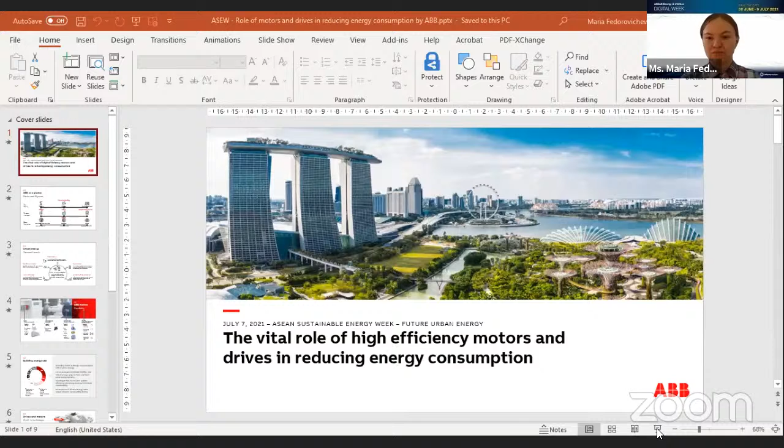Thank you, Peter, for introducing me. I'm extremely glad to be here and present to you solutions by ABB for improved energy efficiency. I will start sharing my screen shortly, and let's begin. As Peter said, I represent ABB Motion, which means I will be talking about motors that provide motion and the drives controlling motors, as well as about services for improved energy efficiency and reduced energy consumption.

First of all, I would like to introduce ABB to those of you who are not familiar with our company. ABB is a global industry player, a technology leader, and we manufacture and offer products, systems, and services for different kinds of industries, for buildings, and for transportation and infrastructure. ABB is a global player, and we operate in over 100 countries globally. We have over 100,000 employees, and we are present in Asia, Middle East, and Africa.

Our revenue last year was about 28 billion USD, which gives some understanding about the company scale.

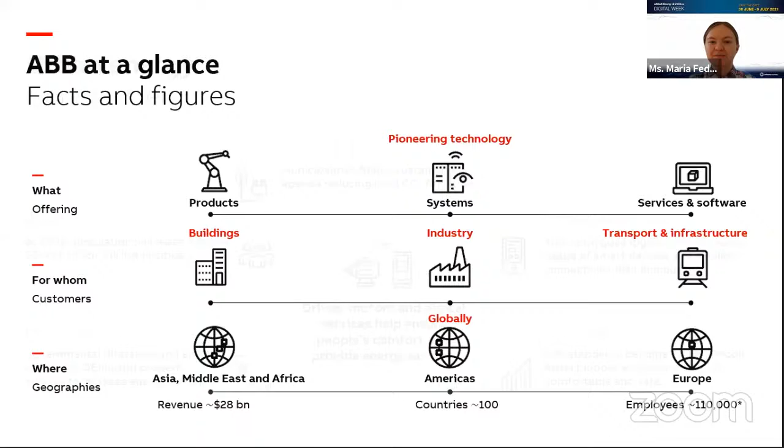Let's move to the essence. I would like to talk a bit about general trends present in urban energy. One of the biggest trends is energy efficiency. There are many different governmental directives and initiatives on improved energy efficiency, and those regulations force OEMs as well as property owners to improve the efficiency of their products and of the facilities they own, and of course buildings are no exception.

At the same time, another very noticeable trend is population increase. By 2030 population will reach 8 billion people, and 60% of the population lives in cities, which is a reason to think more about the sustainable urban environment.

Sustainability is another very big trend. It embraces energy efficiency, but besides energy efficiency there are also other factors coming under sustainability, for example wise material usage. Different municipalities have their own agenda on sustainability and CO2 emission reduction.

Another very big trend is digitalization. The world truly goes digital, and the usage of smart devices and wireless connectivity increases substantially day by day, which means our solutions should support this trend and support digital capability. I see that younger generations also expect all solutions to have some sort of digital capability and follow the IoT agenda.

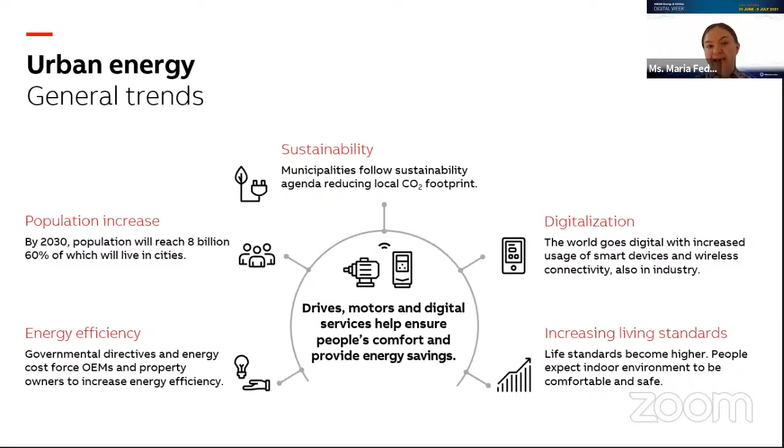One more trend which truly affects urban energy development is increasing living standards. Living standards become higher and higher because people expect the indoor environment to be more comfortable and much safer than it used to be years ago. I'd like to highlight that drives, motors, and digital services by ABB truly help ensure people's comfort and provide substantial energy savings. We will talk a bit later about this in the presentation.

First, I would like to introduce the portfolio of ABB Motion we will be talking about, and discuss how it helps improve energy efficiency. We have drives in our portfolio ranging from kilowatts to megawatts, meaning we can cover a very wide range of applications. Talking about urban energy, it can be small HVAC applications inside buildings, and it can be huge cooling plants, for example. Within the drives offering, we also have digital services.

We also have mechanical power transmission and electrical motors in the ABB Motion portfolio, again covering a very wide power range, meaning a very wide range of applications. Together with digital services, we have IEC motors, NEMA motors, and large motors and generators in our offering.

What I'd like to highlight is that we have truly innovative motor technologies in our portfolio, for example synchronous reluctance motor technology. Probably the biggest benefit of this technology is that besides very high energy efficiency, it also offers a very high level of sustainability because it does not have any rare earth magnets in its design. This is something we always emphasize, so it's also a very sustainable product.

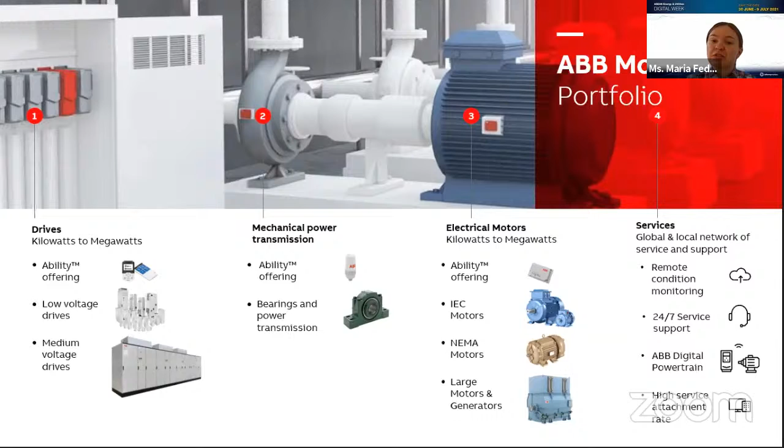Let's talk about urban energy a bit more. Talking about the urban environment, buildings are something to focus on. Building energy use: about 50% of energy used by an average building goes to HVAC—heating, ventilation, and air conditioning applications—as well as to water supply systems. It's wise investing in HVAC energy efficiency improvement, because with this we can substantially decrease building energy use, and also the energy use of the urban area.

So you truly see how important it is to invest in building energy efficiency. The International Energy Agency has reported that about 30% of energy used globally is actually used by buildings. This is the reason why we are so focused on building energy usage specifically.

At the same time, besides improving energy efficiency of buildings and HVAC systems in particular, it's also important to look closer at district energy in urban areas, because this can further improve energy efficiency and sustainability of urban areas.

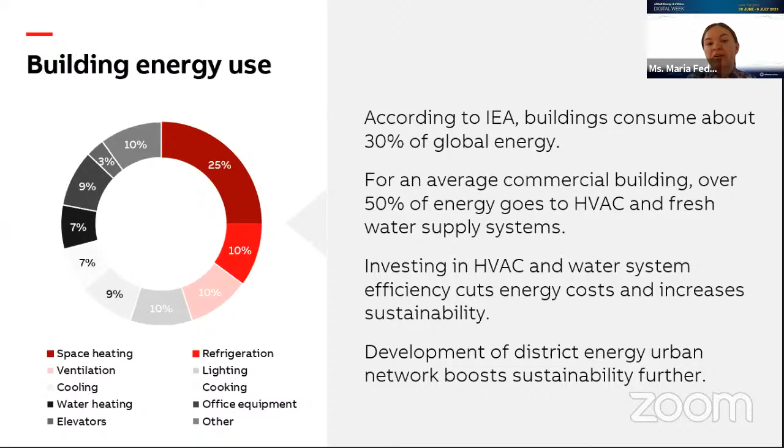Considering drives and motors' role in improving energy efficiency, motors run different kinds of HVAC applications - fans, pumps, compressors - and investing in motor technology can reach substantial energy savings. I already talked about synchronous reluctance motor technology in our portfolio, and this technology can offer up to 30% higher part load efficiency compared to traditional induction motors with the IE3 energy efficiency level.

I'd like to highlight that here we talk about part loads, and as you know, building HVAC systems usually do not operate at 100% load. So we often talk about part load operation.

But going further, motors are controlled by drives, and drives in turn can significantly cut energy usage in HVAC applications. On average, they can save 20 to 60% of energy used by fans, pumps, and compressors.

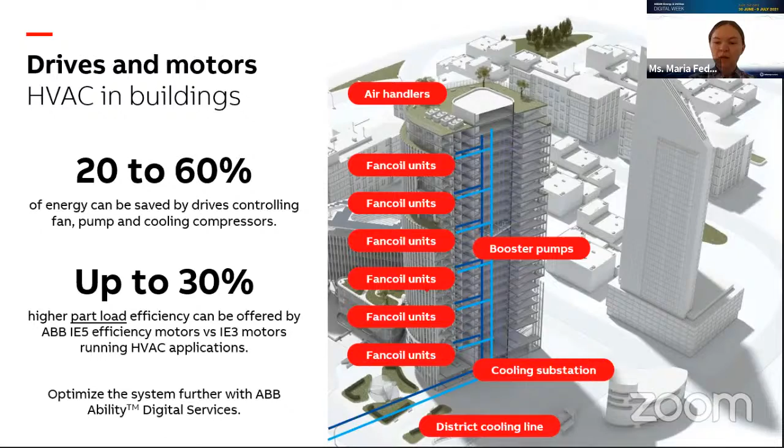One more thing I highlighted earlier is that district energy is something to focus on as well, because up to 50% reduced cooling energy consumption can be achieved with district cooling. So centralized cooling generation is much more efficient than cooling generation on site or individual cooling generation.

And then, of course, drives and motors play a substantial role in district cooling as well, because you always have a cooling plant generating cooling, and you always have compressors or chillers run by motors and then controlled by drives. So drives and motors are actually present in all HVAC and cooling applications in particular.

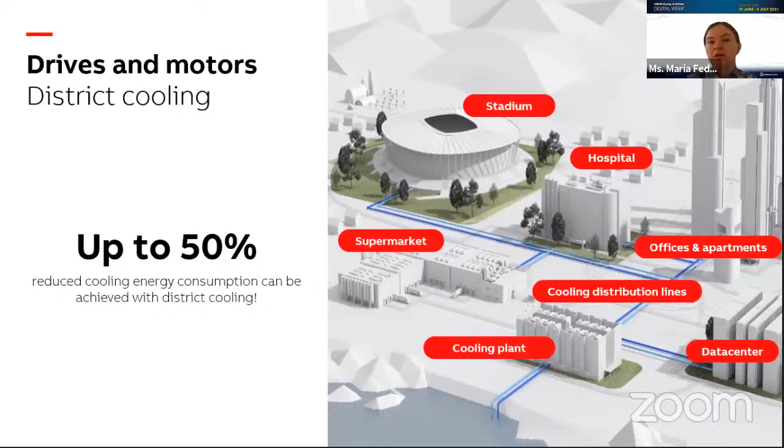And this is my main message for today: to look closer at what kind of drive technologies you use and what kind of motor technologies you use. Because using the most prominent motor and drive technologies, you can make the highest energy savings in your cooling applications.

But then services, digital services, is something not to forget about, because digital services truly improve the transparency of your HVAC processes and cooling generation in particular. With the ABB Ability digital services, you can monitor HVAC application performance and see what kind of inefficiencies you have, and of course take actions on eliminating those inefficiencies.

At the same time, talking about reliability, some of the buildings supplied with cooling are mission critical facilities, and of course we have to ensure the cooling process continuity. So digital services are able to significantly eliminate the downtime of your HVAC applications.

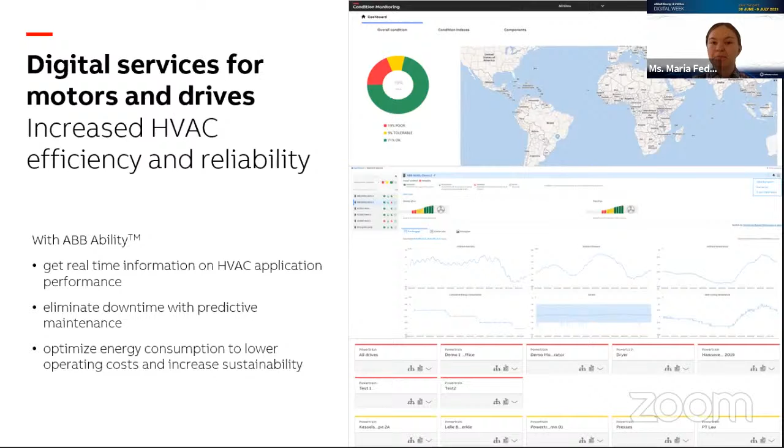And then, of course, seeing the inefficiency points, you can optimize the energy consumption and eliminate those points. This transparency gives a very good card to play, I would say, and this is why we keep increasing the number of digital services in our portfolio and the digitalization rate of the sustainable and energy efficient solutions by ABB. So it was a quick presentation from my side.

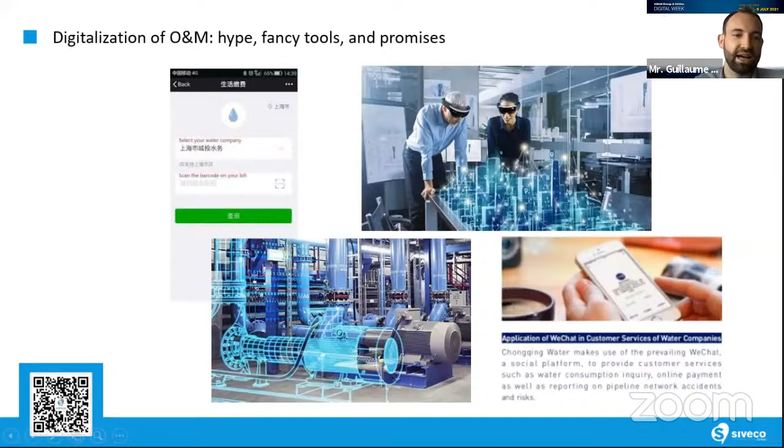So here is a topic: we've seen a lot of hype regarding the future of O&M, primarily driven by exciting developments in information technologies. We've seen many promises for operation and maintenance to work magically and be transformed through the power of big data. Sometimes we hear assumptions that predictive algorithms will replace technicians, and that all breakdowns will be avoided. In fact, this has been very much exaggerated and somewhat misunderstood. However, there is a real transition taking place, and I will share some practical insights on how we're seeing this fourth industrial revolution taking place, and what it means for the O&M worker of tomorrow.

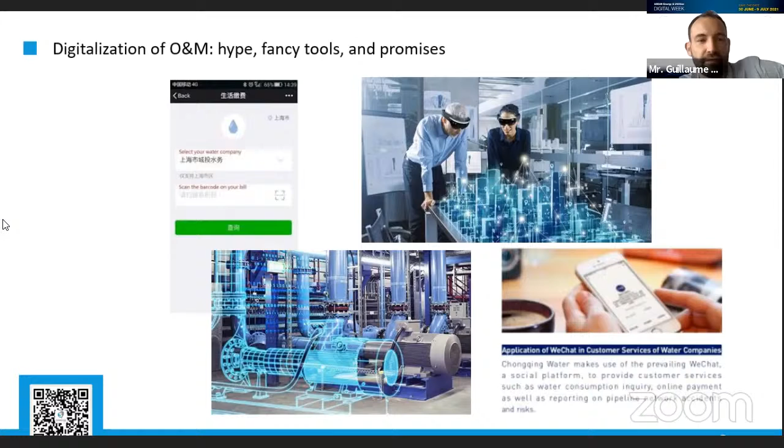So before jumping into the future, I'd like to go back four years in the past and share with you some very profound and interesting insight we got from a survey that we ran together with industry and academic partners. In this survey, we asked simple questions about operation and maintenance to managers with industrial and infrastructure backgrounds. The conclusion was that, far from being seen as purely a cost center, maintenance and operations were considered tightly related to risk management and compliance.

That's to say that most managers were considering the discipline in a highly strategic way. That was a big difference from the traditional narrative that puts cost reduction at the front. The reality is that practitioners believe cost efficiency derives from compliance and effective risk management, and that was a very important takeaway that we brought further in our thinking here.

When we look at some trends, we can see this survey was a good illustration, because there is increasing complexity and distribution of assets. We used to have centralized power generation; now it's more and more spread across various locations and technologies. It's growing in technical complexity and connectedness, and on the other side, ownership, operation, and maintenance tend to be separated between an increasing number of distinct actors as markets open. In parallel, the regulatory framework tends to get stricter, accompanied by increasing social pressure to demonstrate responsibility and accountability.

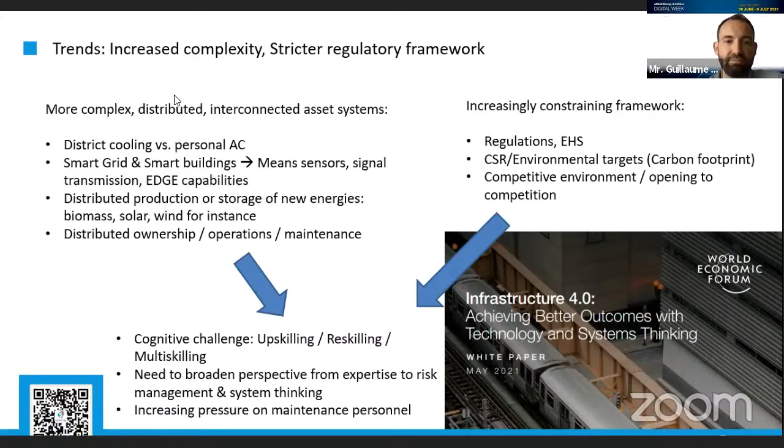So all of this, we believe, leads to a cognitive revolution centered on the technician, who needs to adapt his or her skill set and take into account the broader perspective of risks and systems thinking in the face of this complexifying environment. This brings two big challenges that we believe are at the core of the future of operation and maintenance. The first is that traditional system implementation, as it used to be done, focused too much on traditional IT concerns, and it fails to address the trends we just highlighted.

Traditional implementation focuses on admin, cost tracking, workflow, the ERP-type stuff, and less on the value-creating process of continuous improvement and decision making that are the core of operation and maintenance now. So this needs to be abandoned, or refocused at the least. The second issue is that different use cases tend to be disconnected from each other and subject to what we call techno-determinism — the false belief that technology will successfully change the organization in the way it was intended to. For example, believing that implementing predictive maintenance will automatically improve the bottom line ignores other factors that could be strategic, environmental, or organizational. This needs to be addressed.

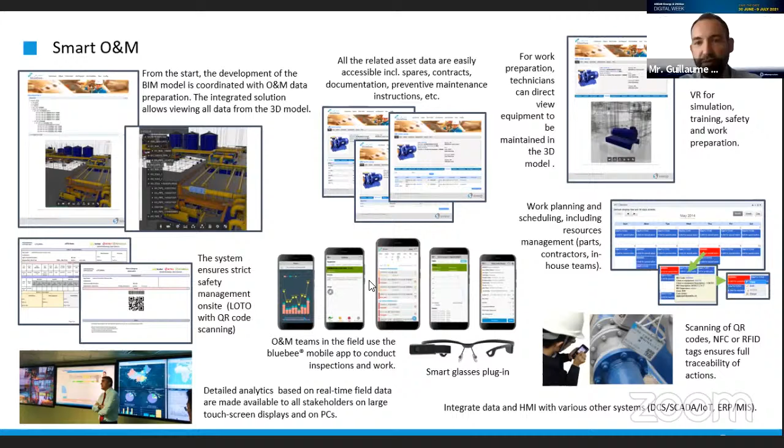The mobile should be the tool from which the operation and maintenance technician can activate the 5 steps we just mentioned. He should be able to review the asset situation, operationalize the maintenance plan, input feedback, and verify key metrics, while the back office ensures consistency with other systems and overall compliance with the regulatory framework, with ISO 55000 and other relevant standards.

So let's now move to a few case studies. For us, the future is kind of already there — as I said, William Gibson is a famous science fiction author. I will introduce what we've been doing recently with Hong Kong Drainage Services Department, Singapore Power Group, Sherry here in Chongqing, and Zhongshan Public Utilities in Zhongshan.

The first case I'd like to share is the implementation of our smart O&M platform during construction. We leveraged BIM as a starting point, using the existing BIM and ensuring it was properly tagged with asset IDs as one of the steps of our distilled ISO 55000 approach, making this ID consistent for usage in operation and maintenance.

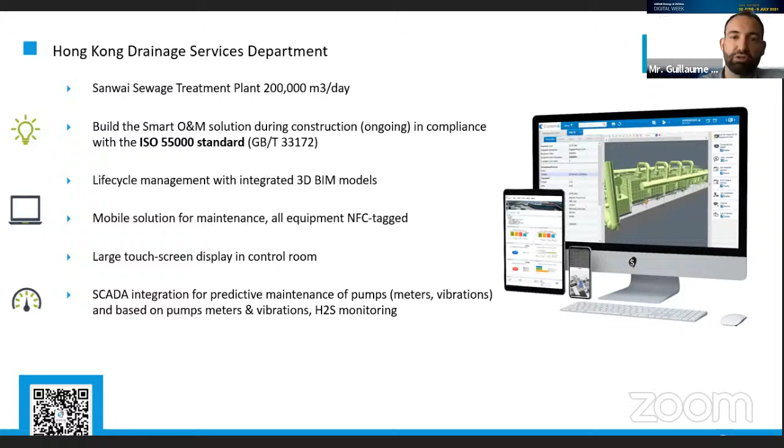So we have a smooth transition from construction to O&M through the BIM. Lifecycle management was then established through digitalization of the maintenance plan, which could be delivered to the maintenance technician in a handy format while retaining the link with the BIM. The BIM can be contextualized for important maintenance activities, such as establishing safety procedures and coordinating complex work with contractors. As a last step, the platform was integrated with existing SCADA to support predictive maintenance of pumps, a critical focus identified through the early establishment of the asset strategy.

So the whole approach has been kept very consistent with the principle of asset management through the platform.

The second case study is in Chongqing. The iconic Raffles City Chongqing complex is a very large property development — 1.2 million square meters with 350-meter towers. Sherry is in charge of operating the cooling system with very strict oversight from the building operator.

In this setup, digitizing the daily inspections and technical activities was the starting point and key to compliance. For example, scheduled inspections are channeled to the right technician's mobile for the right day, and feedback is verified through offline-to-online interactions, such as QR code scanning for the most critical inspection points. The work feedback is accessible on the cloud through a dedicated business intelligence setup, which enhances how Sherry's work quality is perceived by its clients and develops accountability around the transparency principle.

We made this discussion easier by strictly following the assets structure. And finally, let me introduce you to what has been done at Zhongshan Water.

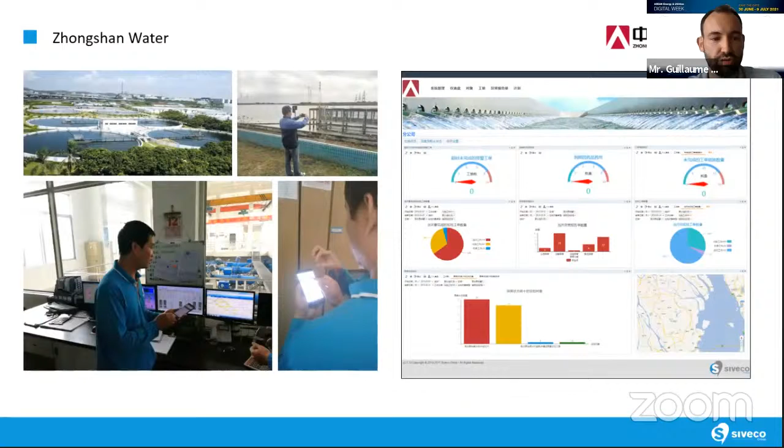So it's a great example of a project where we started simple, but with the right ISO 55000 setup, one can build the foundation for more ambitious and future achievements.

At the beginning, Zhongshan Water was motivated to enhance its risk prevention and field management processes, starting with digitalization of water quality inspection, since they serve a population of 3.5 million under strict water quality guidance.

The project led to automatic generation of the inspection plan on a daily basis. This was already quite powerful, since changes in designs can be made and dispatched immediately to the 5 plants using the system. Changes become easily traceable and auditable, and execution feedback is processed immediately, increasing the ability of the monitoring tool to react fast to any perceived issue or threat.

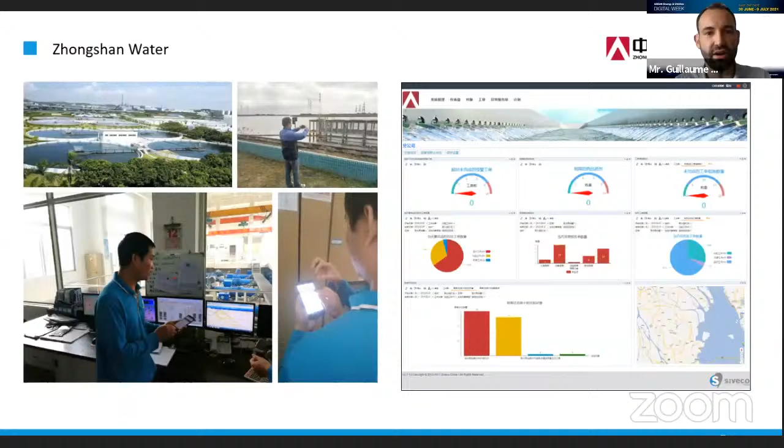That was the initial goal, but this relied on a good application of the ISO 55000 principles, especially the positioning on the asset structure, the maintenance plan, the execution procedure, and so on. So just after we managed to use this data...

After considering this data, we had the idea, jointly with some students from Shanghai universities, to leverage organization structure data, asset GPS location, asset management plan, and execution performance history, and public data such as traffic condition and CO2 emission, to define the best possible allocation of work through an experimental algorithm aiming at optimizing transportation time and CO2 emission. To me, this is the true future of O&M, where we have a sound implementation of digital tools that leads to an exciting achievement in this example, in prescriptive analytics.

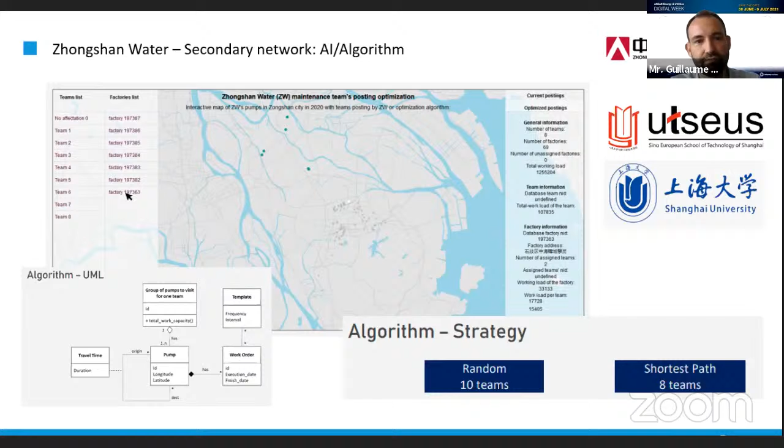Usually it's not the other way around. To share a conclusive thought, I would say there are 3 ideas here.

One, we're seeing increasing complexity, including in the interaction between information systems, and this is a source of value that must be leveraged. And to counter techno-determinism and simplistic IT approaches, O&M excellence principles, such as those embodied in ISO 55000, must be an integral part of the organization strategy and must be reflected in its IT tools.

The last point is that by letting the technician take the central place, we can ensure we will capture more of, or most of, the created value that comes from technology.

So thanks a lot, and thanks for your interest and consideration, and I'm looking forward to the questions.

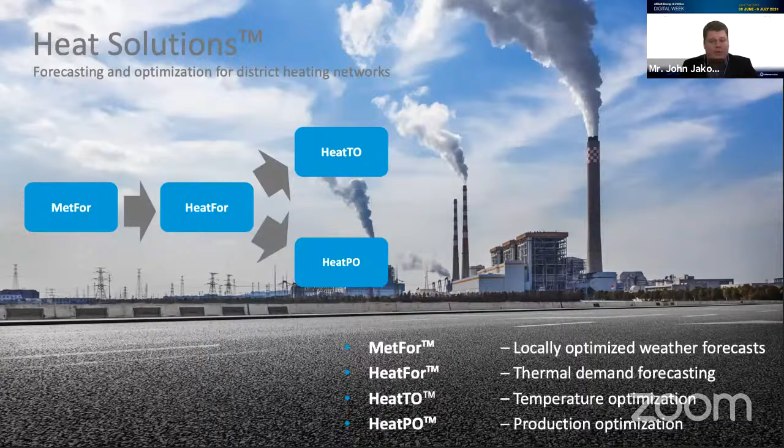So we start with MetFor. As I said, this is a software module for locally optimized weather forecasts. Accurate weather forecast improves both the heat demand forecast, the temperature optimization, and production optimization. The MetFor module accuracy is the key of the performance of Heat Solutions.

The next module is the HeatFor module. This is a software module for forecasting of the demand in the district heating or cooling network. This is a self-learning and self-calibrating software module. It is based on machine learning algorithms, weather forecast provided by the MetFor module, historical demand in the system, and online measurements from the network. All this combined to automatically produce accurate demand forecasts for the district energy system.

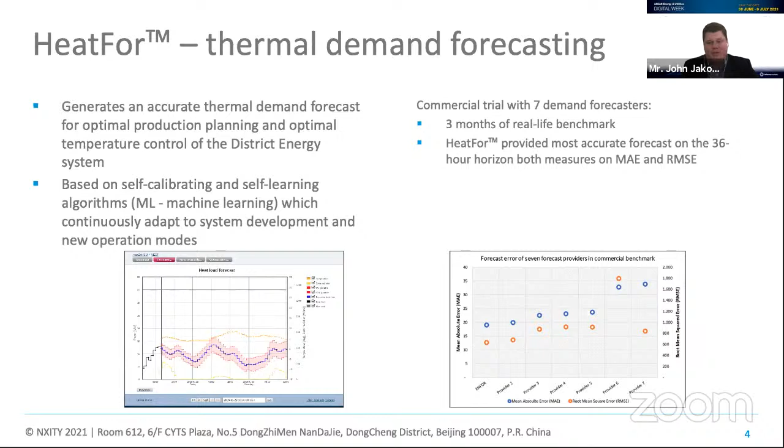The HeatTO module is a software module for temperature optimization in district cooling and district heating networks. This module uses heat demand forecast and online measurements from the district energy network to control the supply temperature. This is to make sure that heat losses, heating or cooling costs, and the CO2 emissions are reduced. At the same time, the quality of the supply is increased.

Another benefit with this solution is that it's possible to prevent peak load energy surge complications for heat and power production plants, often called CHP, where you produce both heat and power. This means that more electricity can be produced if the temperature can be reduced in the district heating network.

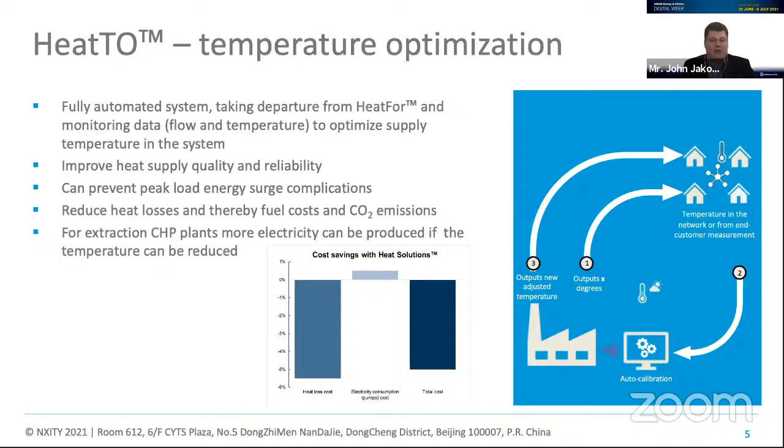And then the last module is the HeatPO, which is the production optimization software. This is used in pool-operated cooling and heating networks, where you have multiple production facilities. The software uses demand forecast, data about the production assets, and limitations in the heating network to generate robust production plans which satisfy the thermal demand at a minimal cost.

A good example of this is that a production plan with higher cost to produce energy in a situation where demand increases will only be used when cost-effective production facilities are running on its max capacity. The decision process of this kind of operation is complicated and often not very efficient and cost effective when it's performed with manual controlled operation. This is where the HeatPO module shows its real benefits.

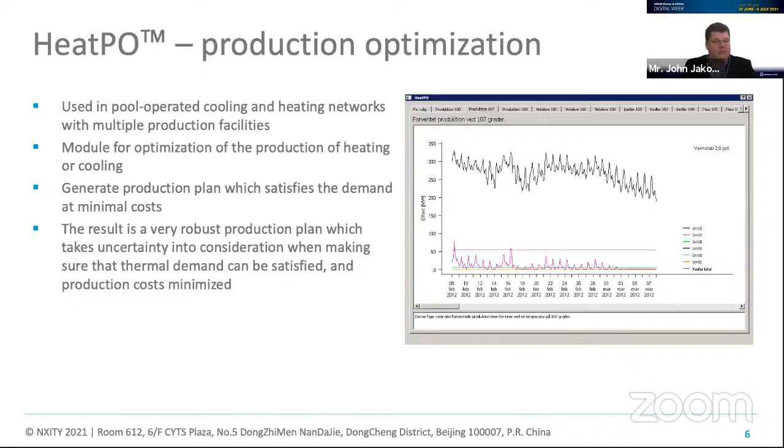Here, I would like to show a glimpse of how the software looks like.

The critical points are locations in the network where it is identified that the demand has been most difficult to fulfill. Flow data, temperature data, and energy data collected from these critical points will be prioritized in the software to make sure that the supply is sufficient and meets the demands.

What happens in the network between the supply point and the critical points is known with help of machine learning. The software knows about the expected demand. It knows about transportation time in the network at a certain flow rate. And it knows, based on weather forecast and calibrations, if production facilities need to increase or reduce production to optimize the supply.

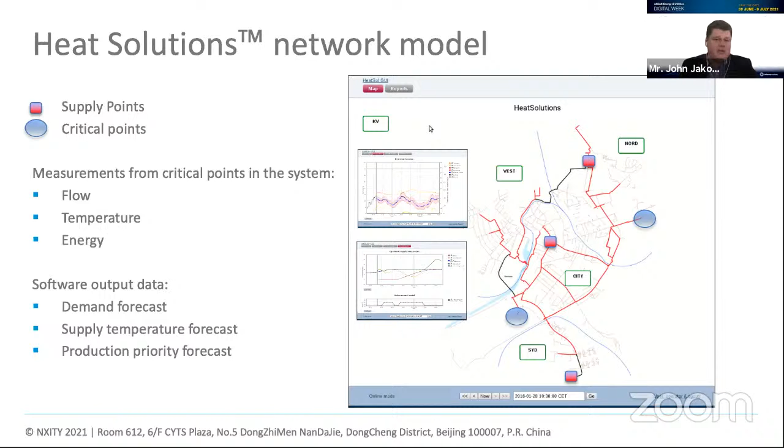This was my short presentation, and this was what I wanted to show you today. And if anyone wants to know more about this, don't hesitate to reach out to us and get further information. Thank you very much.

Thank you very much, John, for sharing about your Heat Solutions. I think it's interesting to see the progress, or example of how AI and machine learning can be used to increase efficiency in heat and cooling networks. And of course, by forecasting weather and consumer behavior, you can get a better sense, and you can plan energy production in an optimized way. And also interesting to see how you can optimize temperatures to reduce losses. And that's, of course, low-hanging fruit to increase energy efficiency and lower costs.